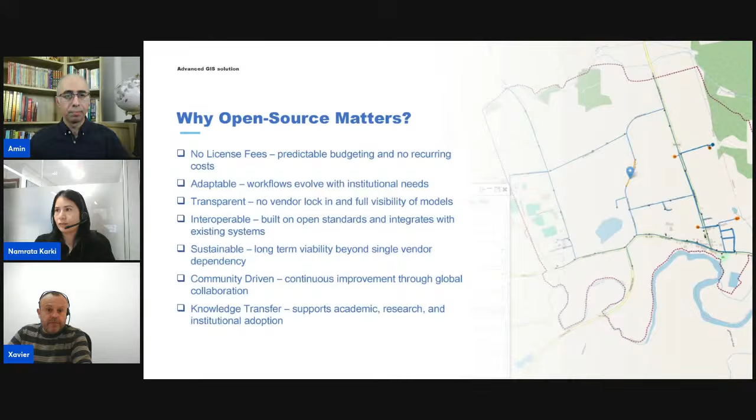In the presentation today, I will explain two of the software tools we have developed in recent years. One is Giswater, the other is IberGIS. I will tell you a little bit about what the Giswater platform is. It is software that integrates asset inventory and hydraulic modeling, both dimensions of any asset, in the same environment. You can manage in this GIS the inventory properties of an asset, let's say the color, the location, the asset ID, but at the same time, in the same database and software, you will have the hydraulic capabilities of that asset.

This is the only software in the world that integrates both, and it makes real the possibility to work with an asset inventory and at the same time a hydraulic model. No migrations, no moving data, nothing. Everything integrated in the same platform. The project was born in Barcelona in 2014, more than 12 years of successful path in collaboration between BGEO and the Polytechnic University of Catalonia.

Okay, the software is able to manage urban drainage, sewerage, and water supply systems. It is available on desktop, web, and mobile. Furthermore, our Giswater platform is capable of working with integrated hydraulic models. Asset mapping and visualization: this is like a current and normal GIS. It provides comprehensive geographical visualization of pipes, valves, hydrants, pumps, storage tanks, meters, and other water distribution assets.

It has a predefined, pre-built data model which could be extended by your own characteristics. But this pre-built data model allows you to work with sophisticated capabilities and rich and complex database issues. On the other hand, you can work with predictive maintenance and asset management. You can identify pipes or assets with risk of failure based on model forecasts and historical data. It optimizes maintenance planning and budget allocation.

In fact, depending on the data, we have two core engines. To work with rich and good quality data, in order to reduce the uncertainties, we work with our model. But on the other hand, if you have poor data, if you only have the previous leaks or previous failures of your system, but you don't have good quality data about diameter, material, or when that pipe was built, then in order to manage a huge level of uncertainty, we work with another model based on the Shamir-Howard paper published 50 years ago, which only works with leakages. It is the only thing you need to know when your pipe should be replaced.

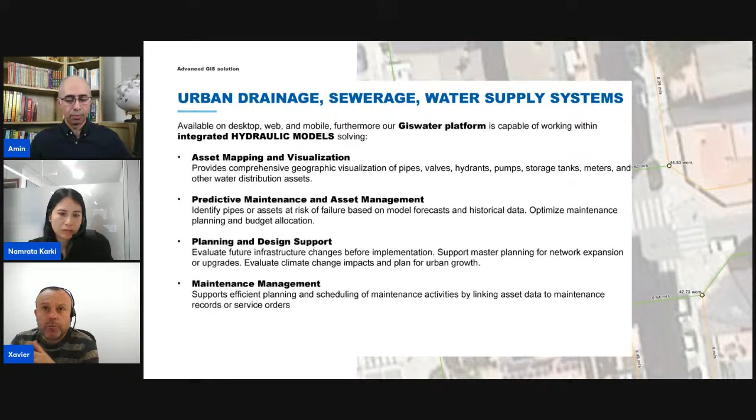And it is also possible to connect this software with maintenance management software, in order to know how many events have been done on any asset, how many times any asset has been visited, and any aspect related to maintenance management that could be useful for you.

Here you can see the interface of the desktop GIS. We use QGIS. We have developed a huge plugin, more than 30 buttons, something like this, which makes it easy to work with this specific kind of project, based on conduits, pipes, tanks, storage, junctions, blah, blah, blah. And it has lots of functionalities to make it as easy as possible to work with. In fact, Namrata will show later different characteristics of this plugin based on QGIS desktop.

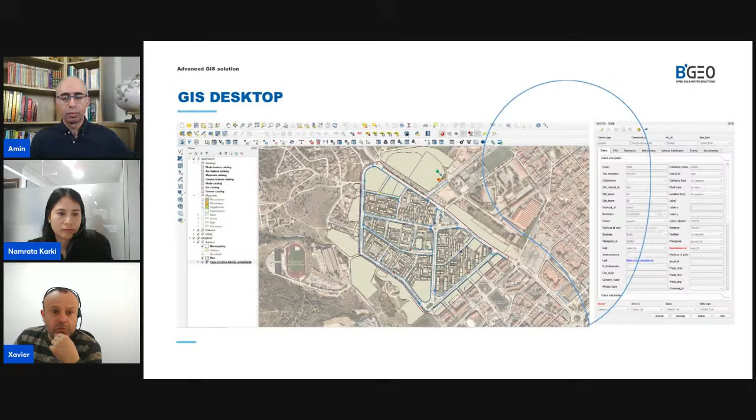This plugin also has specific tools with stored functions to make spatial analysis, check data quality, run hydraulic models, and you can even work with your own new stored procedures by using this toolbox button. In addition, this toolbox has a reporting button, with which it's possible to create your own reports to publish and share with your colleagues in the utility, reports like how many kilometers of network relate to your different municipalities, how many kilometers of network based on your different districts, how many service connections, etc.

No? The big thing here is that any process for toolbox and any reporting could be customized and adapted to fit your current needs.

Here you can see the asset manage tool, which is an amazing tool to determine which pipes should be replaced by doing a multi-criteria analysis. As I explained before, with this tool what we do is analyze different criteria, let's say diameter, material, age, length, number of leaks, probability of failure, and based on these, we do risk theory analysis, classifying what pipes should be replaced and in what order, in what year those pipes should be replaced.

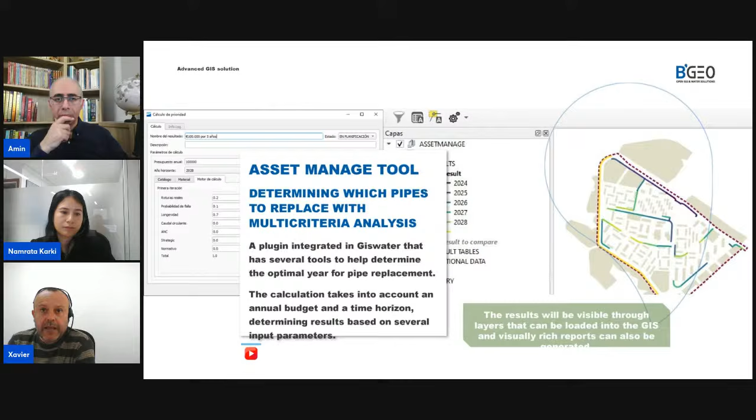This is a water supply asset management tool, and right now we are starting to work also to do the same for urban drainage and sewer systems. This is a little bit more complicated. We are putting our focus on video inspections with AI analysis, and I will say that this will be a new development in the next years.

The thing is that as this software is database based, it is very easy to integrate with other technologies. It is only a matter of working with different APIs and integrating, as I said before, SCADA systems, customer systems, mobile and device systems, CMMS software, in order to work in a unified and good environment for the water utility. Okay, this is a little bit the Giswater platform.

Another interesting tool that we have the pleasure to work with is IberGIS. IberGIS is an open access QGIS plugin, which enables you to work with a coupled model for urban flood analysis, bridging drainage networks and surface flows with precision, flexibility, and real-world applicability.

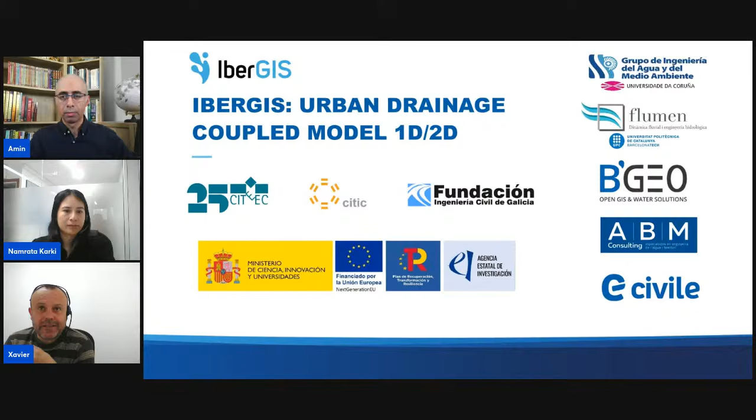IberGIS was released only 4 or 5 months ago, the first version, and it was done by BGEO in collaboration with a couple of universities in Spain which are working with this Iber software, I will explain a little bit more later, and in collaboration also with other companies in Spain. After 3 years of hard work, we released the first version 4 months ago, and it is a big pleasure because it fills a huge gap to work with these UD flood risk management models.

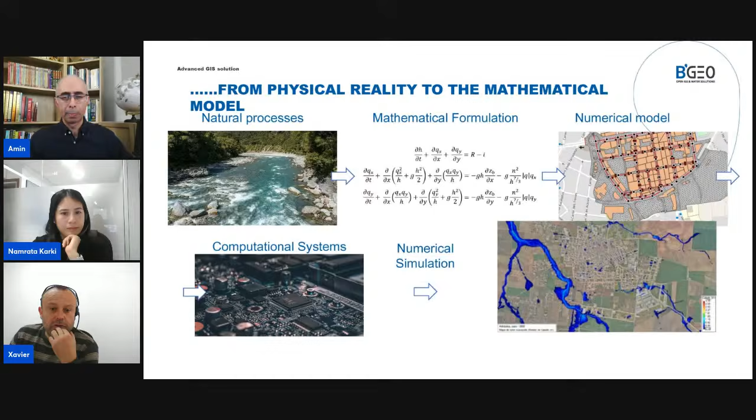What this software does is try to represent as best as possible the natural processes by doing mathematical formulations and by creating numerical models. It works with Navier-Stokes equations, it works by using the shallow water equations, and finally, you can represent the floods and the velocity, the elevation, the risk on the surface, combining the capacity of the conduits plus the surface of the land.

Okay, but before incorporating the conduits in this project and before incorporating the QGIS interface, Iber was born in 2010 by mixing 2 softwares that existed at that moment, Turbillon and Carpa, and it was developed by these 2 universities in Spain, Universidad de Coruña and the Polytechnic University of Catalonia. And after 15 years, they have released different versions. In 2018, they released the Iber GPU, which makes faster and faster simulations of shallow water equations.

And the key point here was in 2023, when the first version of Iber integrated with the Storm Water Management Model was released. From that moment, it was possible to work with coupled models, drainage hydraulic models, but there was not a good interface. And for that reason, in the last 2 years, we spent a lot of time incorporating this coupled model into a QGIS interface.

And right now, what we have is an integrated hydraulic and hydrological model, everything in QGIS, by joining both models: Iber, which is a shallow water equations and hydrological model, and the Storm Water Management Model, which is a hydraulic model for conduits.

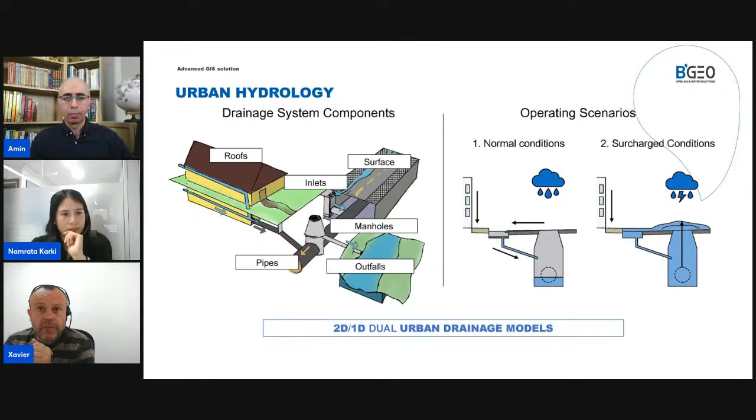This is a free distribution 2D, 1D high resolution dual drainage model software. You can download it and start working with it. In addition, it is parallelized, which means it works and solves super fast.

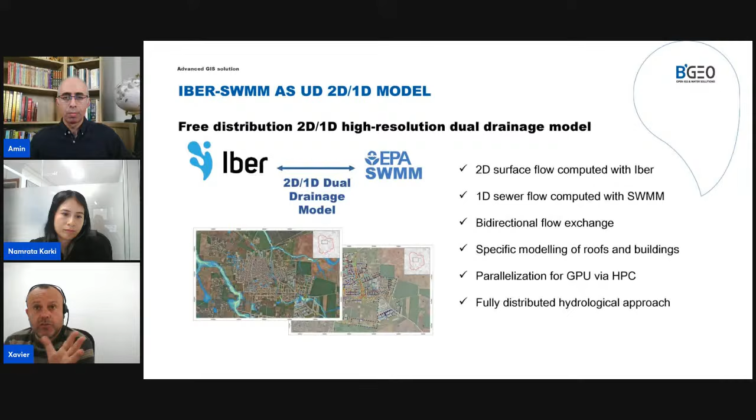If you know about these shallow water equations hydraulic models, you need to know that the Courant condition maybe is your worst limitation. But if you work well with the Courant condition, the solution of big projects is really, really fast.

Here you can see different images about the input data, how you need to work with digital terrain models, curve number, land uses. This is a classical approach of any hydrological model. The thing here is that everything could be done in the QGIS interface. You don't need any software for nothing.

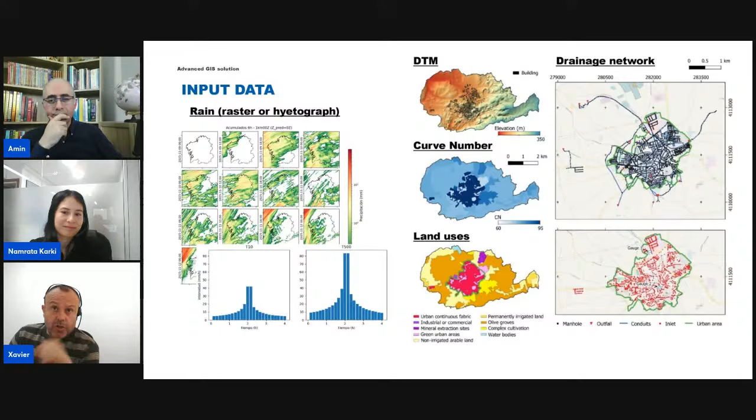You don't need pre-process softwares. You don't need post-process softwares. Everything is integrated into QGIS.

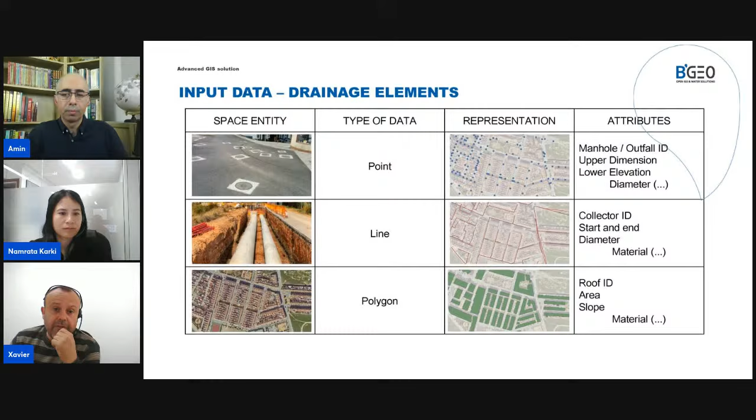Here you can see the different shapes, the different drainage elements that we work with. You can see points like manholes, outfalls. You can see lines like collectors, and you can see polygons like roof and ground surfaces. Everything designed to work with 1D and 2D software.

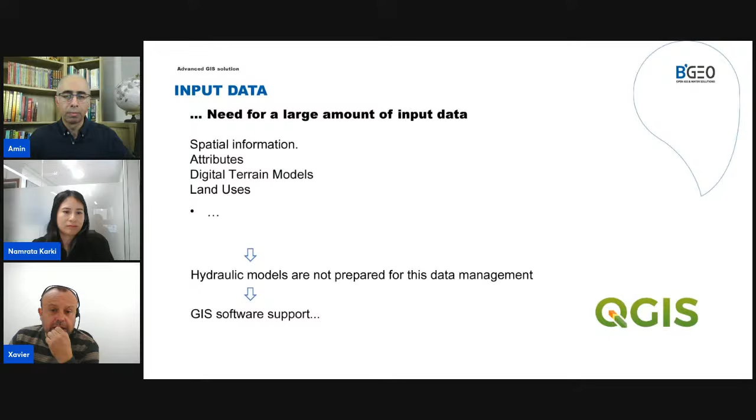And you need more spatial information, attributes, digital terrain models, land uses. Everything that you need could be done in QGIS.

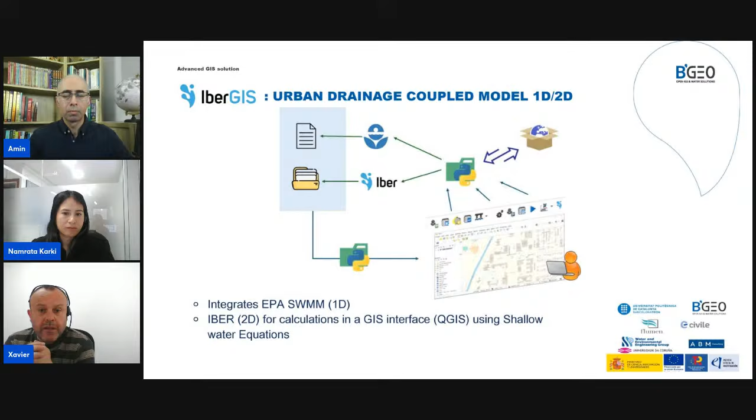Here you can see a new image of how it works. In fact, it mixes both models in one single computation, and this is how it works.

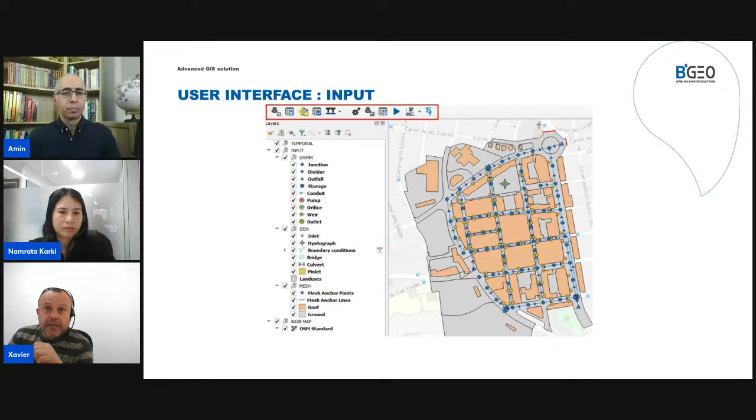Here you can see the user interface. Here you can see the toolbar button. It is a matter of maybe 10 buttons in QGIS, and here also Namrata will show you a little demo of how it works later on.

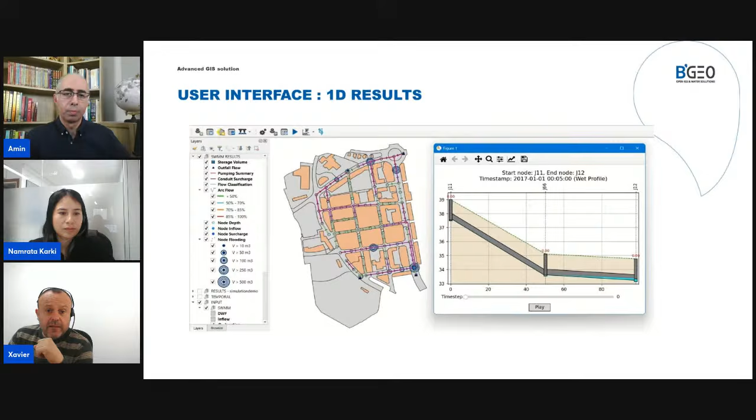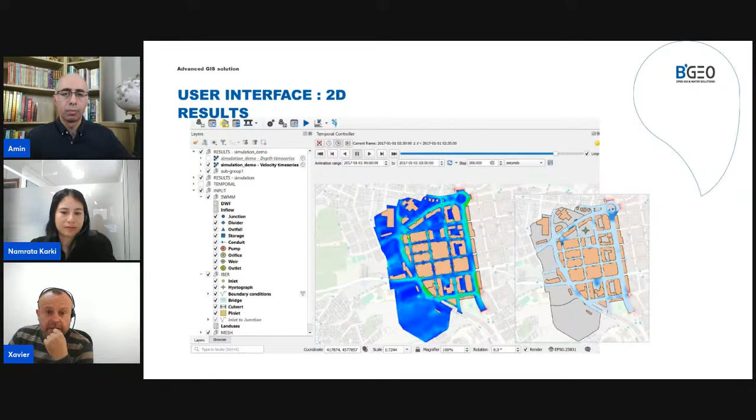Here you can see the results. This is an image of a profile. And here you can see the results, an image of the elevations and the depth and the velocities that we have in the surface.

And here you can see depth and velocities, but in this case not for surface, but for conduits. And we have done several proof of concepts, and it is very easy to publish these works on a web.

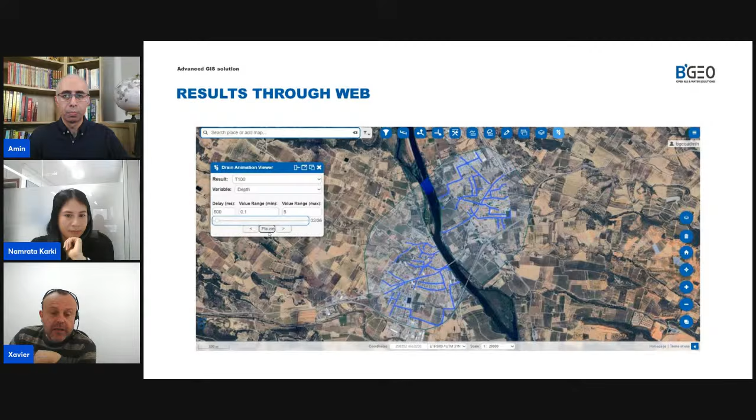In BGEO, we are a GIS company, and we love to use QGIS web platform, which is the QGIS desktop but web-based. We have done different proof of concepts, and the future is to go in this direction, not only using QGIS in desktop environment, but also making these hydraulic models work in web environments, by doing the same, but working in a collaborative model and doing amazing things, everything in web-based solutions.

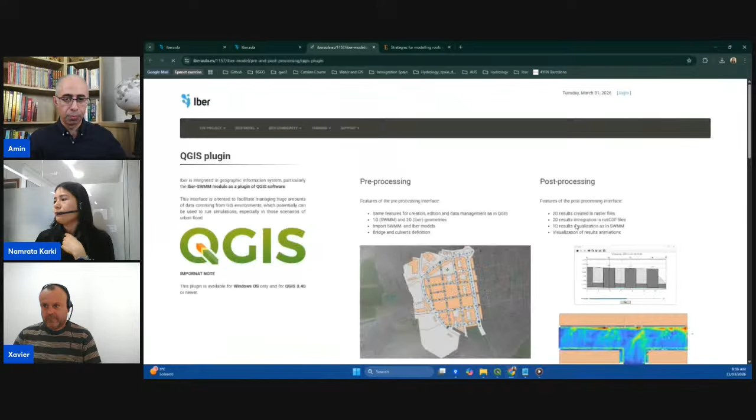So here you have the information of this QGIS plugin, a little bit of images and pre-processing descriptions, the mesh generators, basic general information about the plugin. You can also have documentation here, a startup guide of how to start. It's both in Spanish and in English, so if there are Spanish speakers it would be helpful, and there's English as well.

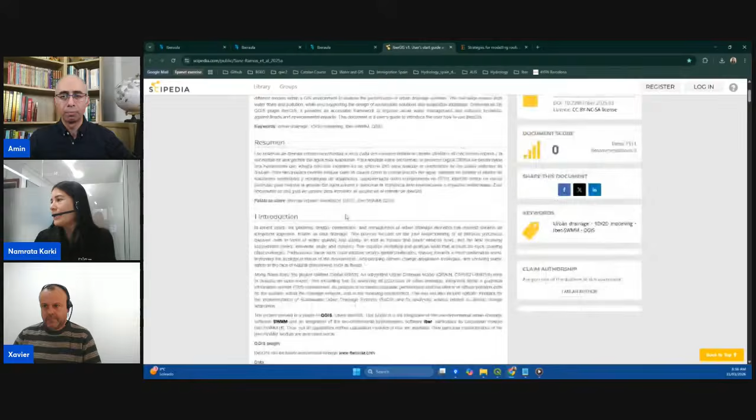So you just need to click here. The only thing is you need to register with your email ID, but that's all, it doesn't ask anything else. As soon as you log in, you can download the zip file, and then install the plugin with that zip file.

Once you have the zip file, it's pretty simple. It's basic QGIS: you go to plugins, manage and install plugins, and then install from zip. For the moment I already have it installed, so I won't install it again, but just wanted to show you the basic procedure of how to obtain the plugin.

So once we have this, you can see this button - this is the IberGIS button. You also have here the open user folder and actions. You can also open the plugin folder to check what's there - all the Iber executables are already there, so you don't have to install it. It's just a backend, it works in the background when you execute simulations. To start, you just click the button, and then here you have a pop-up dialog.

You can give a name for the GeoPackage. As you saw in the presentation, IberGIS works with GeoPackages, and then it goes back and forth with the simulations and Iber. We are currently working on PostgreSQL too, since having a database is even faster than GeoPackages, and multiple people can work at the same time on the project, which is a really good advantage for big projects and multiple people collaborating. But for the moment we only have GeoPackages for the release.

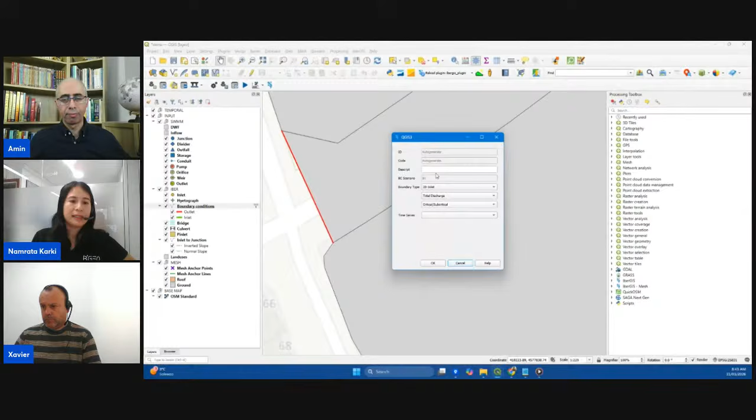To create a boundary condition, it's pretty simple. You just go to one of the edges you want to create a boundary condition on, click here, and this line is selected as a boundary condition. Then you can decide if it's an inlet or an outlet, if you want total discharge or elevation for an inlet, critical or subcritical. If you have time series for that inlet, you can also add that. So yeah, pretty simple, one click, easier, faster, very user friendly.

To input time series, we have this button called non-visual objects manager. These are non-visual objects like curves, patterns, time series that are necessary for your stormwater management model, but also for your IberGIS model for the time series.

So you can have curve patterns like this for the pumps, for the flow, for your storage you can have a pattern. Those kinds of things you can have. You can also have patterns for the flows, daily, hourly, anything you like. So everything is quite integrated for what SWMM needs as input to run a simulation.

And for the time series, you can have rainfall or inflow. As I said, in the boundary conditions too, you can create an inflow. If I push this create button, you can see BC elevation, which is boundary condition elevation, BC flow is boundary condition flow, inflow hydrograph, orifice, rainfall, temperature, anything you possibly need for your modeling inputs, you can put it.

Not just that, you can have relative or absolute values, or you can also include a file. If you have raster folders for rainfall, which is quite common these days, you can also input your rasters for the rainfall, and choose if it's an intensity or volume. The only catch is the rasters need to be in the same folder as the geopackage for now, in this release, but apart from that, everything works perfectly fine.

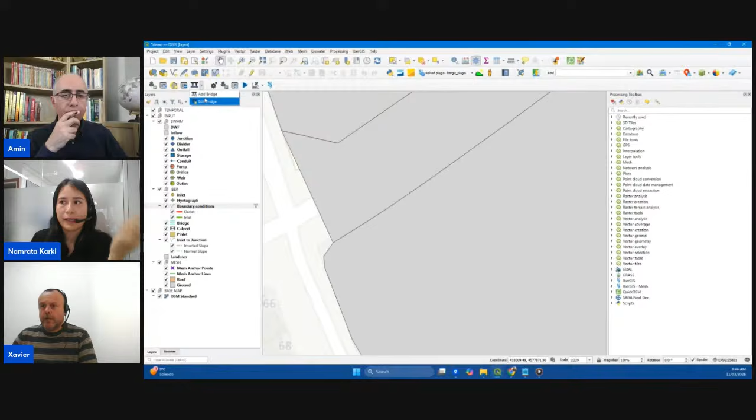For example, let me just add a DEM, so it's easier. Once you have this plugin, you can open the plugin folder, and in the resources folder you can find example files where you have the geopackage, INP, and raster.

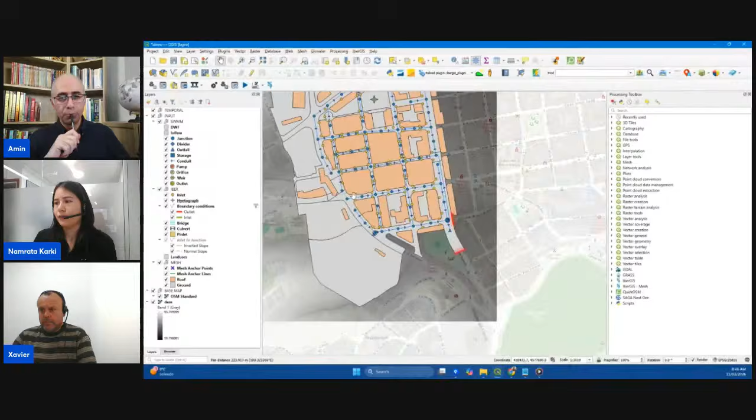So for example, if I have this DEM raster here and I want to create a bridge, here's a bridge. Let's say if I add a bridge—of course that wasn't so great—but yes, I can add a raster file, which is my DEM, and then add my bridge according to that. Of course, my DEM is much higher than the bridge's top elevation. This is the default value, but of course you can change it. Let's say 45, and then let's say 44.

So that's one of the ideal bridges that you can create. Not just that, you can also create some piers in between. So let's say I have a pier at 15 meters, then another one, then another one I have at 16 meters, and then I have opening percentage as 100.

So you can also create a bridge, like a pier. This opening value is just like a percentage of opening of the bridge. So if you have any obstruction, you can also decrease those, and that will be integrated in the modeling too. So yes, you can do as you like. And the same way you can also edit the bridge. So if I had saved the bridge, then I would be able to edit the same way.

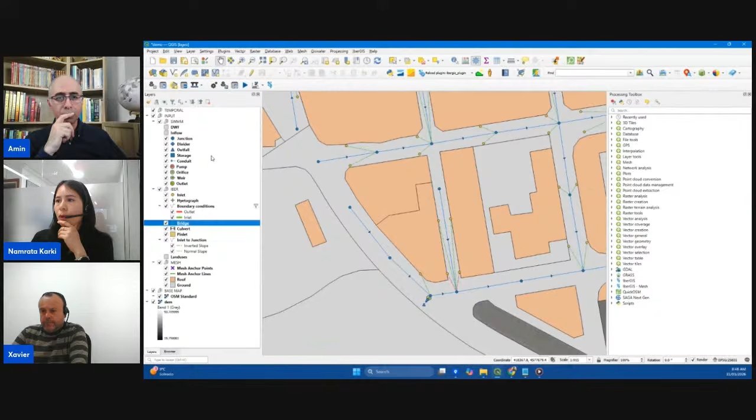After that, what you need is, of course, a hydrograph. So you can just make your hydrograph at any point. So we just have this point. You just create a hydrograph. If you look into the attribute table, it just has the time series, as I mentioned before from the dialog box. You can put any time series that you like, and you can just click what you want to put. Everything is interconnected and made easier for you to work with. So hopefully it's as user friendly as we assumed.

The same way you can also put a culvert, not just the bridge. For the culvert you just need the opening, the start elevation, the end elevations, the Manning, those kind of things.

And next, let's talk about the mesh. So for the mesh, we have two important layers, as I mentioned before, the ground and the roof. If you open the attribute tables, then we have the ground, the code, which is just the code of any features. Then you have the land use. You can have multiple land uses as you like. For the moment, for the example, we just have open spaces. You can have custom roughness and curve number, so you can have multiple values of curve number or roughness according to the space that you are working with. So it can be variable, but you can also have a raster file to get those values too. I will show you that in a moment.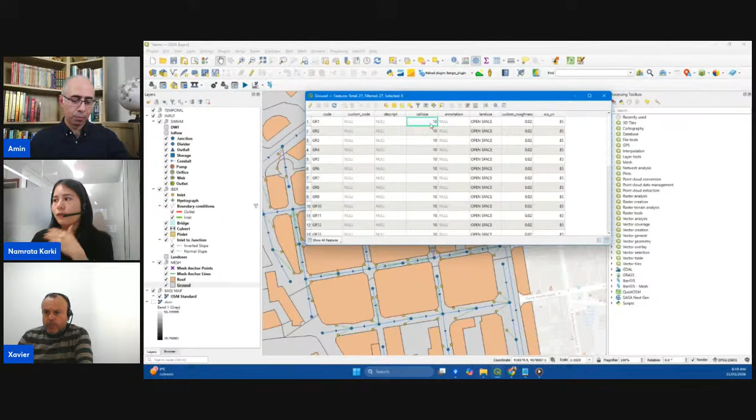One of the things here you have to be careful with is the cell size. So the higher the cell size, the lower the resolution, of course. So if you want a higher resolution mesh, then you can of course decrease your cell size.

And the same with the roof. The roof we have a little bit different. We have the slope, the width, the roughness, if it's connected to the network or not, which outlet code it is, which outlet of the network it is connected to, the outlet volume, if it's going to the street, if there's any infiltration volume. So all of those things. If it's like a green roof, then you can have the infiltration volume and the cell size in the same way. So you can have all those set up as per your data.

And then once you have that, you just need to work with this mesh manager button. So with this mesh manager button, same as boundary conditions, you can create multiple meshes. So you can change your roughness or change your curve numbers, land use values, or change how it looks. You can create multiple meshes for your project.

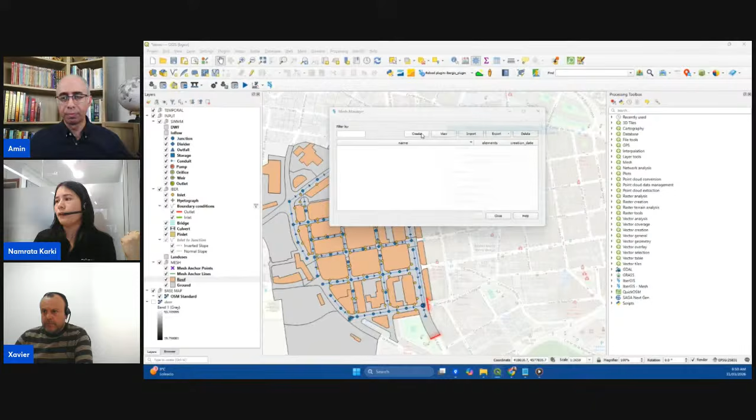So if I just create here, you have these couple of input data checks. It just checks if all the layers of all the polygons of grounds and roofs align well with each other, if the vertices are okay, those kind of things. We also have a couple of tools in the processing toolbox that help you to make your data or the layers fit as well as possible.

And then once you have it, you can create the mesh. You can also apply the boundary conditions, that is the current scenario. So you can have multiple boundary conditions and you can just choose which one is your current scenario, and you can say, okay, apply the boundary conditions from the start. Then you can choose the elevation. So as I said, we have the DEM.

You can also choose a raster for the roughness. Just for the example, as I said, in the example folder of the QGIS IberGIS plugin you have these rasters, roughness and curve numbers, so you can import those and use those. If you have your native one, you can of course use those. You can also use from the ground layer itself, from the attribute table, and the same for the losses.

And then you can just give a name as you like, and then you create a mesh, and it's pretty fast, and it's saved to the GeoPackage as well. So if you like the mesh, you can keep it. If not, you can just modify it. Not just that, you can just select some features. If you just want to create a mesh of one part of your area, then you can also do that. So there's a lot you can do.

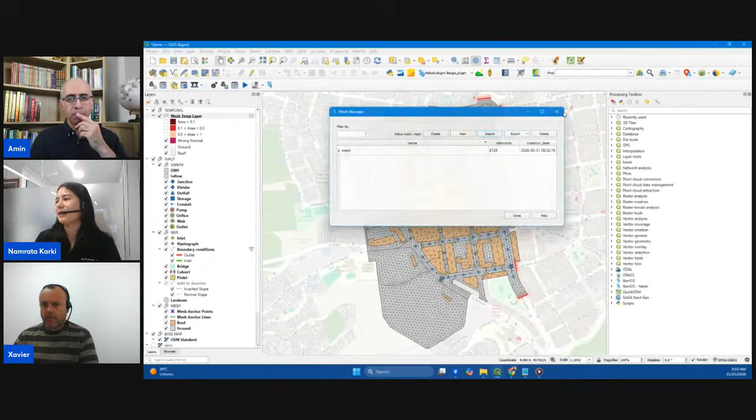And then what next? So you have the mesh, you have your roughness, you have a land use. I just want to show you a couple of processing toolbox tools. In the processing toolbox of QGIS, we have these two subgroups, IberGIS and IberGIS mesh. As I said before, everything has been made as user friendly as possible, helping you to integrate all your data as easily as possible. So we have all these import ground geometries. If you already have some shapefiles or anything, you can just import those.

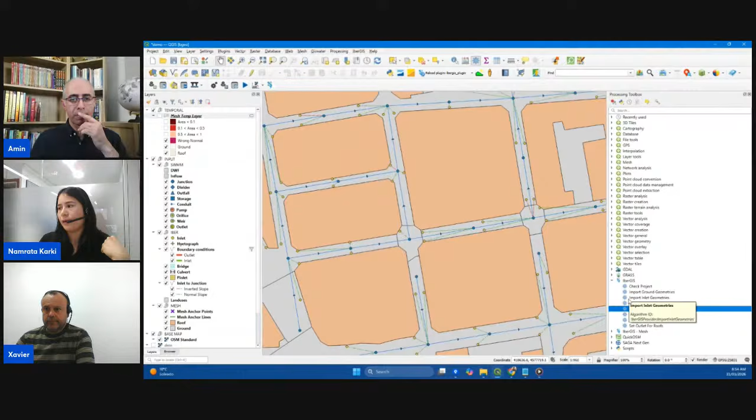Import inlet geometries, which basically means the inlets that take the 2D flow to the network, like this. The roof geometries, of course. There are certain checks to be done before creating a mesh so that your mesh is created correctly. So you also have this processing tool to check close vertices, if you have really close vertices, intersecting or overlapping polygons and so on. You can have mesh validations, and you can choose a ground layer, choose a roof layer.

Not just that, you can choose any layer from your QGIS, and after it's okay, you can import them into the ground layer. And if you have any null geometries, roof null geometries, all those things, you can just run it and it does the check, and it says right now we don't have any errors. But if you do have any errors, it creates temporary layers that show exactly where the error is, which is really helpful if you have a really big area and want to correct those.

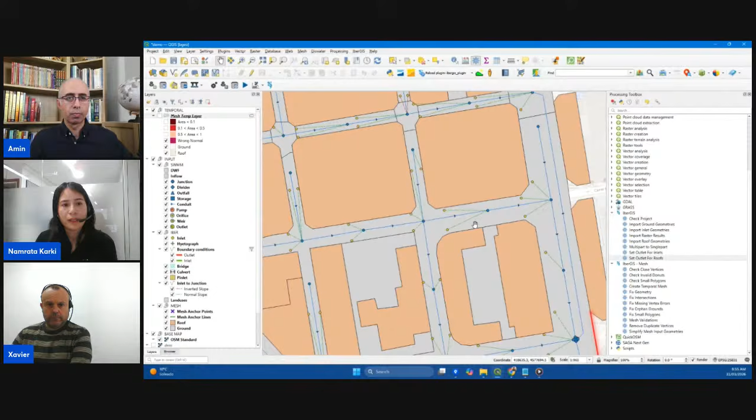Then the other thing is you might have to connect where your outlets go to the network, or where your roofs send the water to the network. So you also have this set outlets for roofs. You just click on your roof layer, then you have the raster layer, and the outlets are of course the junctions, then you just run, and automatically it gives you at least the basic idea of how the water is flowing.

You can also change it if you like. Here it's just a matter of changing the code. If you know that a certain junction is taking water from a certain roof for sure, then you can also change it. But for the preliminary analysis, I think this works pretty well. The same with the inlets to outlets too.

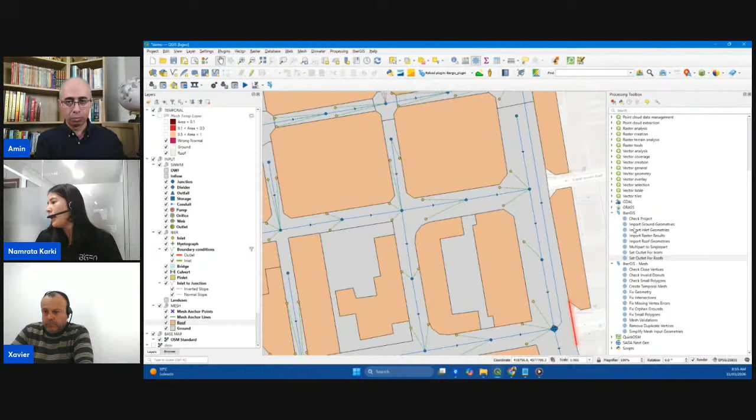So now we have the layers configured, the mesh, the connectivity of the roofs and everything. So what next? Of course, we make a simulation. And for that, we already have a hydrograph. We already have a rainfall integrated here.

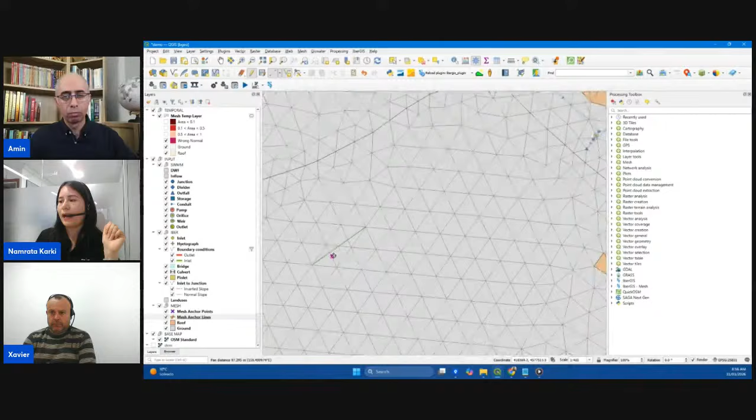A quick mention for the mesh: if you have certain points of depressions or certain areas where you want to change your mesh, but it's not actually present in your DEM or in the layers at the moment, you can use these mesh anchor lines and mesh anchor points. They are basically 3D lines and 3D points with elevations. If you create a line with the native tool of QGIS, and you have the cell size, you can have the Z values in the vertices, and it will generate the mesh accordingly. So you can alter your mesh that way too.

Okay, so for simulations, the important thing is you have to set up the options and your simulation necessities. So this is the button where you have the go to Iber options. So this dialog is basically made for you to check your settings for the simulations.

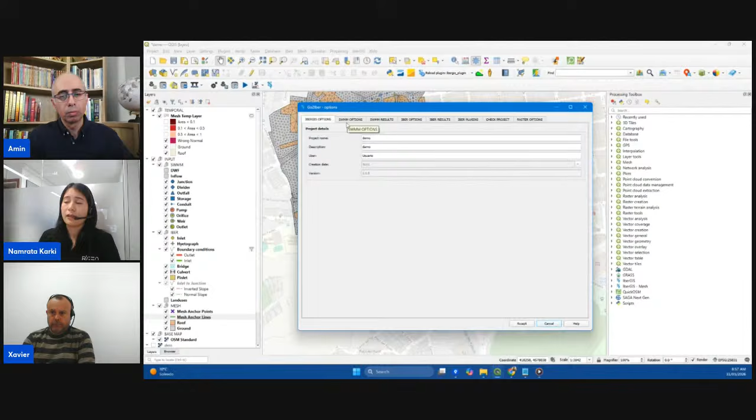The SWMM options is, of course, what is needed for your stormwater management model. So it basically reflects whatever you need for the stormwater management model. If you have used SWMM, then this is exactly the replica of what you have. You can have anything set up, the date, basically everything for hydraulic modeling. For the SWMM results, you can do anything that you like. You can also have it for certain subcatchments, but for SWMM we don't need the subcatchments because it's the whole connectivity of the 2D flow and the 1D flow.

For the Iber options, we have also quite a few buttons. You can choose, for example, here for precipitation, no rain if you just want to work with the dry weather flows. But if you are integrating 1D, 2D, then of course we can have a rain hydrograph. You can also have a raster. As I mentioned before, we can also work with the raster. For the moment, if I just choose hydrograph, then it's going to work with hydrograph.

The current limitation, however, we have for IberGIS is it only works with the curve number method. However, soon this might be fixed too. And then we have the option to just say, okay, there are no losses. You can have a time interval. You will see in a moment.

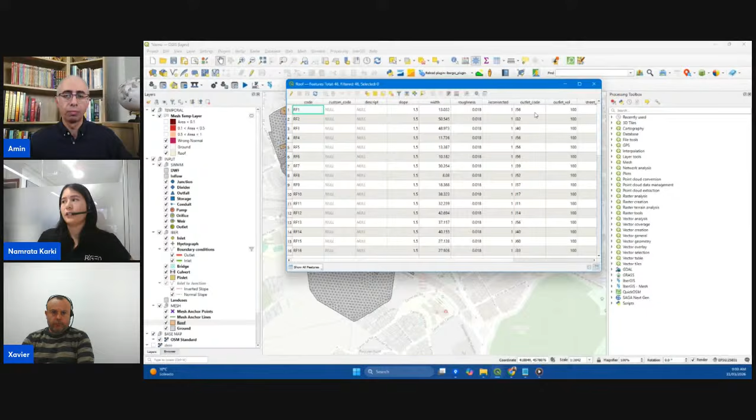And then we have the check project tool, which basically checks everything that you have, like the data, the values, the layers, that everything is intact, all the necessary data. In case of certain data, for example, connecting roofs with the outlet, if it's not there, then by default Iber takes the nearest element. So that can also be done. But certain things like having the Manning out of range, it will definitely check. So once you have it, I'm not sure if I accepted. Yes, no. So once you check everything, you just need to accept.

Sorry, just to mention again, you also have these raster options, which are basically a post-processing of your results. That is symbology for your depth or velocities or any water elevations. You can decide what range you want from the beginning. Of course, you can change it in the layer itself. But if you have a certain fixed range already, you can just set it up there and then it can work with it. So once you have that, everything is ready.

This is also the check project. As I said, it just checks anything. If I run it, it does multiple checks and it says, okay, no items duplicated. So it also checks your SWMM network, but also the hydrological parameters.

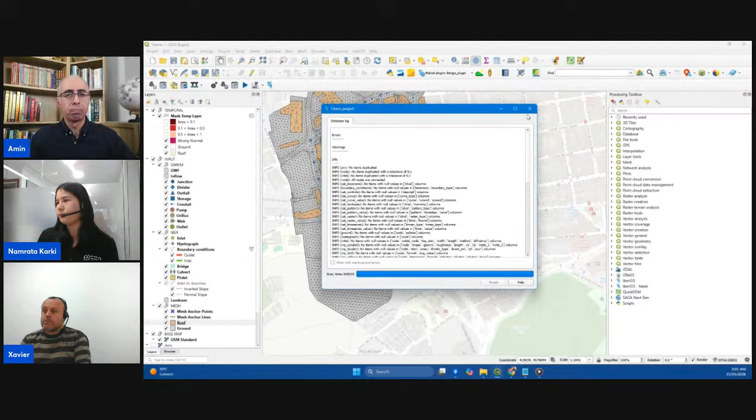So once you have this, this is quite a general button, a play button for simulations, I would say. You just click on the execute button. Here you also have the option to go to the options again and see if everything is okay, and if not, you can just change it and accept it. Then you can just select a mesh.

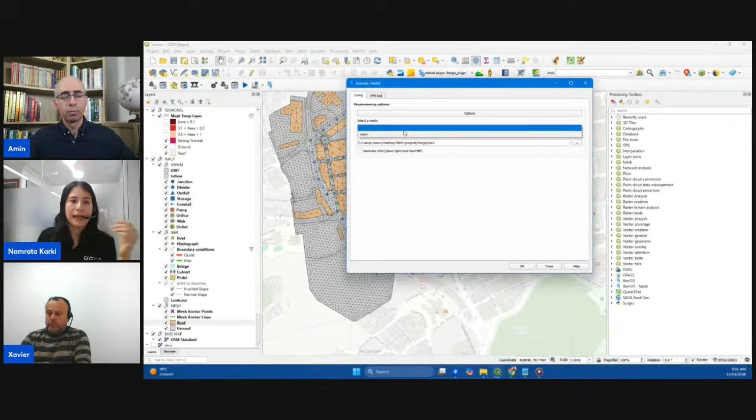So as I said, the beauty of having multiple meshes and multiple boundary conditions is you can have as many meshes as you like with multiple boundary condition scenarios, and you can choose which to select. And then you can just give a folder. Here I can just say, okay, it's the first simulation, of course,

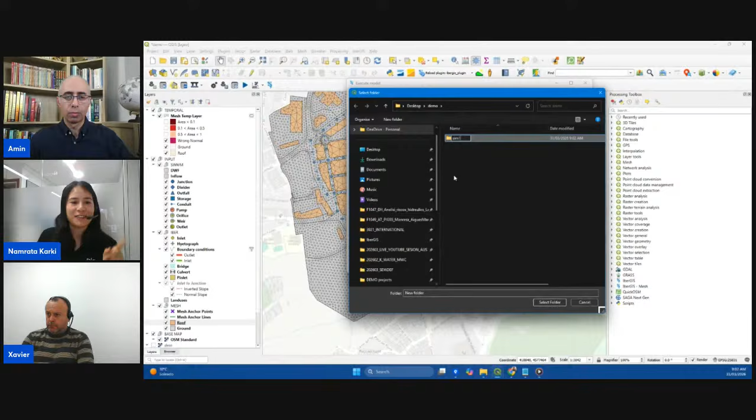because it's not always the first simulation that works in hydrology. If it works, then you are probably doing something really, really wrong or really, really right. Fully agree. That's a good point.

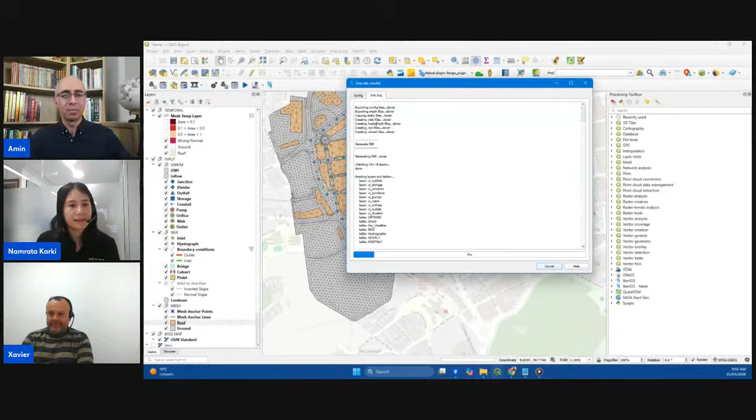So yes, once you select a folder, you just have to click on OK. And then here you can see it's exporting config files. What it is trying to do is write all the input files necessary. Oops, sorry. Usually this does not happen. It's Murphy's law, but luckily I have another that is already ready.

So once you have the simulations, it tries to write all the input files for the Storm Water Management Model and also for IberGIS, and it runs the simulation. So after that, you have the simulations. You have these raster files. You have all these results for the depth, the velocity, and if you click on the temporal layer, you can see how the water is evolving and connected with the nodes.

Of course, this is a small, tiny area without much difference in pervious or infiltration values, so it looks pretty much the same. But if we take a look at the velocity, you can see how the water has been evolving in your network. Of course, to check your 2D flow, it's also necessary to analyze your 1D, so not just the 2D one, you can see how your flow in the pipes is working.

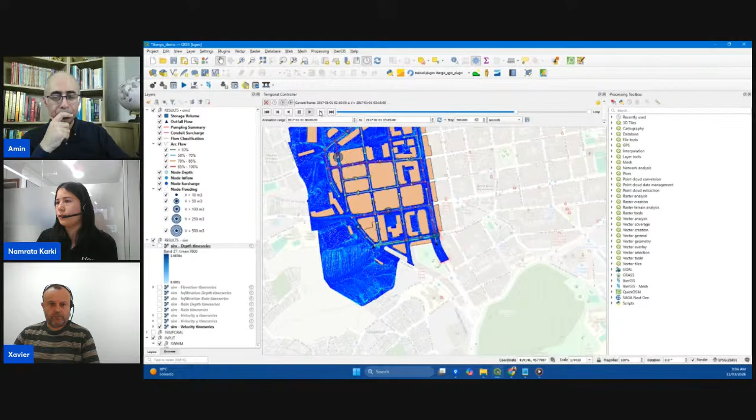So I just pick this one, and it says load vector results. The vector results are the 1D results. If I do it from the start, these are the node flooding points, and the water that comes first with the higher velocities is from this point. So here you see the water is coming here, and at the end, there is water going to the outlet, so water is moving towards it.

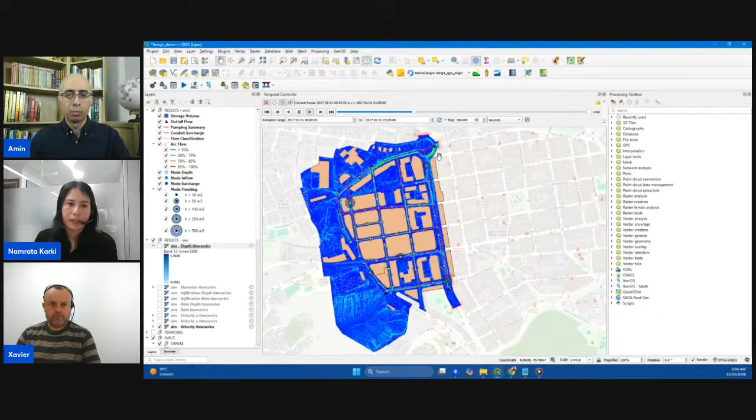So not just the 2D part, you can also check your 1D flows. You can make a profile. You can just click on any 2 points here, the initial node and the final node, and you can say wet profile, and you can have the period for the timestamp that you simulated. And if you draw a profile, you have this dialog box, and you can just play and see how the water is going in your network too.

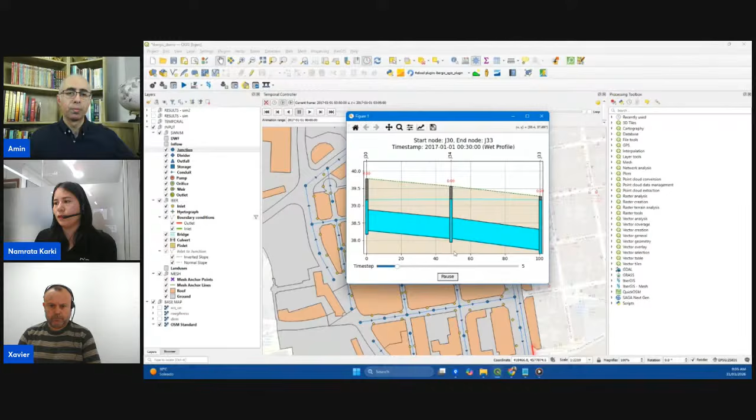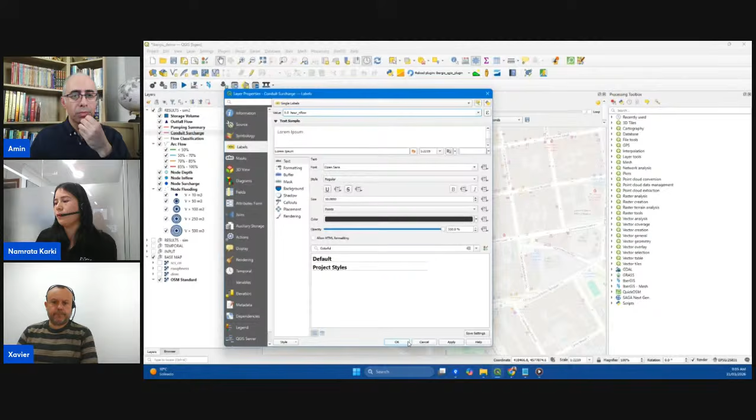Other than that, it's basically whatever you get in your SWMM network results. If I just tick everything, I can see these conduit results. If I try, for example, to label it with maximum inflow, then you see this is the flow. And for the arc flows, you have in the attribute table all these maximum velocities, the flow, the depth, at which time. So it's basically the replica of the Storm Water Management Model results.

So yes, and I think that's basically it. For the nodes, it's the same. You can have all these values. All the results that you get from the Storm Water Management Model, you can have here. You can also have the report summary. If somebody has used the Storm Water Management Model, SWMM, you can have many results. Those are the reports that you can get from this one.

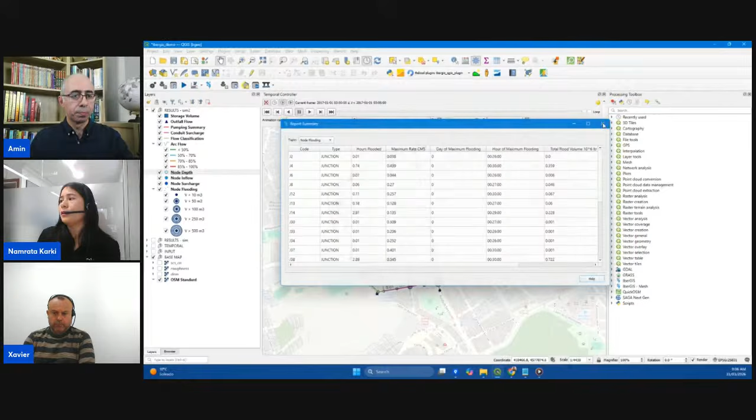So as you can see, everything is done in QGIS. You didn't even have to go back and forth, open a different software to get your results and then come back. With the parallelized GPU capability of IberGIS, it is much faster. We have been working on real projects with meshes of more than 1 million elements, and for 3 hours of simulation, it's just a matter of half an hour or so, including exporting the results. So this is how easy it gets from the pre-processing to the post-processing, because that is the hardest part every time you run a simulation.

Running a simulation is just a button and you just configure it and that's done. But the most challenging factor is how do you integrate those results into nice maps? Like if you have risk maps, it's always nice to have clearly visually expressive maps or results, whether it be communicating to the public or publishing your research papers. So those kind of things are really necessary, and I think IberGIS is really user friendly and helpful for people to work on.

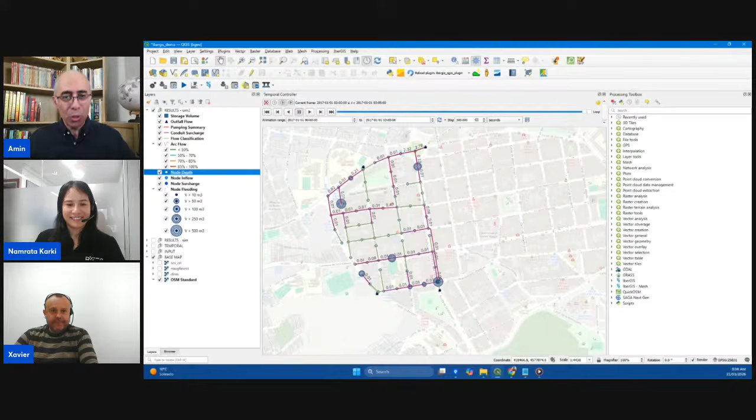I think we can now move to the QA session. I have got a couple of questions. Interestingly, some questions actually came to me through LinkedIn. I don't know why. Perhaps people have been shy, not putting it here. But anyway, it's good to have some interesting questions.

So perhaps one by one, I go through. I start with a general one that I think is good to summarize. I think it's from Ivy, asking: can we summarize the key features of the platform that you have? If you want to highlight one of the key features, the ultimate ones. Yeah, please go ahead. Sure, key features.

Key features. I should say that for both, Giswater or IberGIS: open source, no license cost, collaborative projects, you can work with both in a cloud environment. You can deal with big projects by working with different civil engineers at the same time on the same project, which is unique in the world, and everything integrated into QGIS desktop or QGIS web. Key features: open source, collaborative projects, and QGIS front end.

Perfect. I think that's definitely very important because we all know how tedious it is moving files from QGIS to hydrological or hydraulic models. Yeah, definitely a very important one. And for big projects, the engineering workflows are in serial. This engineer does this, after that, here you have the files. You take the files, you work with files, sharing the files, and it is impossible to deal with big projects in a short time. We are rewriting the workflows of the engineering processes.

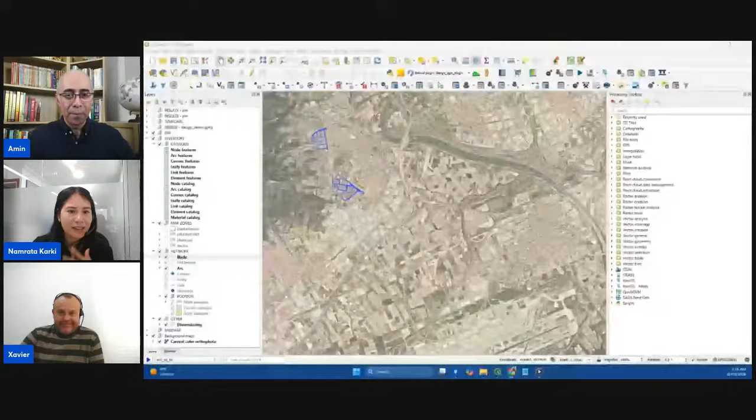I can answer that, let me show you quickly. We didn't have a chance to show you what Giswater is and what Giswater is capable of. So if you can share my screen - this is how Giswater looks like.

As I said, it's just a hypothetical network for example, and it has a lot of buttons. It might seem overwhelming at first, but every button is really useful for your data management and network management. So you have this network, everything.

As we talked about, Giswater is a dual database model. So you have this inventory side that is all stored in your database, and then you have the hydraulic modeling. With all this hydraulic modeling configured, you just have to have both plugins installed in QGIS. Once you have your geo packages, say the land use part or the hydrological part set up, you can just import the geo package project as we loaded before.

Once you have it, there's a button called Go to EPA and Go to Iber. Go to EPA is simply having simulations for the Storm Water Management Model. Again, you do not have to get out of QGIS. You can run the simulations in the backend with the Storm Water Management Model, but also Go to Iber, similar to what we saw before - you have the SWMM options, the Iber options, and you can just run the simulations.

So it's really interesting how, if your network is all configured in Giswater, you can just have a geo package and then connect with IberGIS. In fact, both plugins recognize each other if they are installed and they work together. Thanks, this is quite interesting.